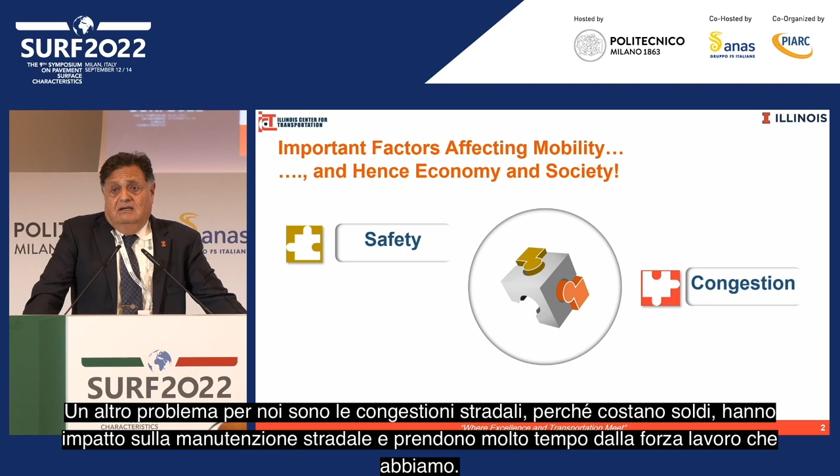In addition, congestion is a big problem for us because it is costing us money. It is also impacting the repair of our roads, and it's taking a lot of time from the workforce that we have. And third is climate change.

Transportation is responsible for 30% of the emissions or greenhouse gases, and now it is the number one sector responsible for the emissions that we have. Most importantly, the emissions coming from transportation are mostly coming from fuel and from oil, and that by itself is a concern.

Now, all this is going to be contributing to the economy and the society. Our role here is to talk about the pavements part and the resilient part of the pavement. So as we are moving forward with this, the three things that I mentioned, I wanted to see how connected and autonomous vehicles will be impacting that.

As we move into connected and autonomous vehicles, the speed of traffic will increase by 8 to 13%, which means we will have a better flow, we will have less use of gas, and this will keep increasing as the penetration of autonomous and connected vehicles increases. Ultimately, we will have an optimized traffic flow and definitely reduce the congestion that we have, because you will have a better connection between the vehicle and the surrounding infrastructure.

As to safety, we will have a much better reliable time as we're moving forward. So as we start applying this technology, the conflicts that we have will be reduced by 47%, whenever 25% of the market is autonomous and connected vehicles. As this penetration increases, the conflicts will be reduced and safety will be advanced even higher and higher.

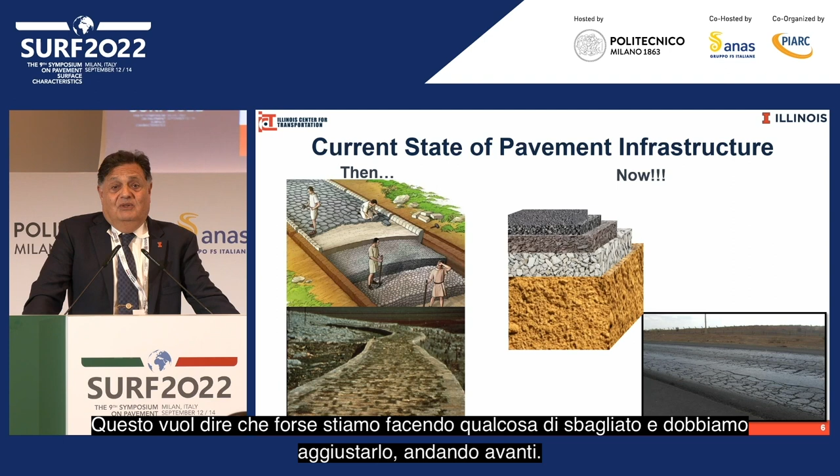Pavements, especially the Romans, they built for more than 2,000 years, and we have some of these pavements still there. Right now we design pavement for 20 to 25 years, and after 10 years it's failing, which means we're doing something maybe not right. We need to fix this as we're moving forward.

I believe the rapidity of technology in transportation—I don't think we've ever seen something like this. It's moving very fast, and this change in mobility is becoming the norm. If we're talking about drones for the first and last miles, electric trucks, or even flying taxis, all this is coming with electrification, connectivity, and autonomy.

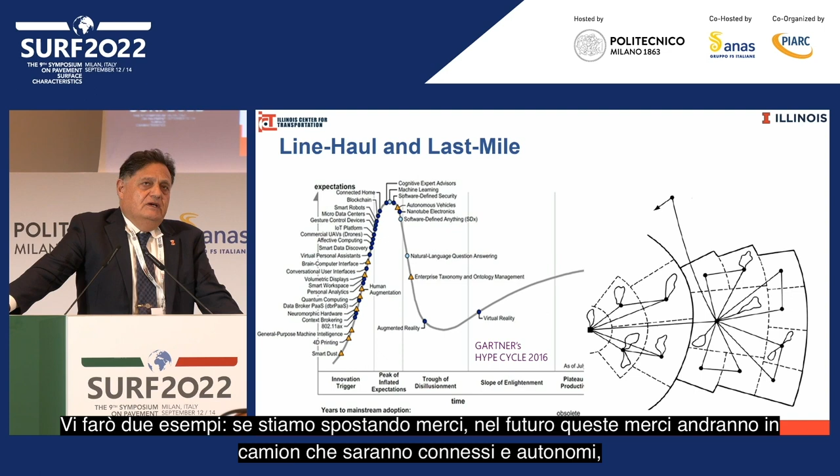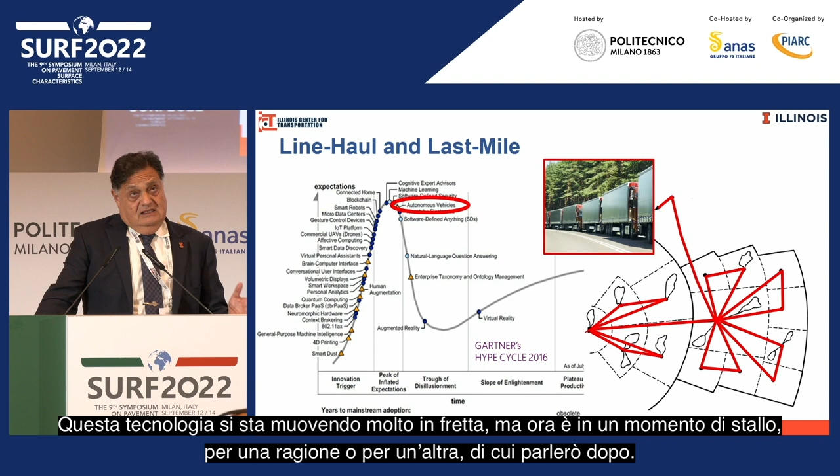I'm going to give two examples here. If we are moving goods in the future, these goods are going to go through trucks—we're going to see autonomous and connected trucks, platoons, using our pavements, and we need to address that. This technology is moving really fast, but now we're having some hold for one reason or another, which I will touch on.

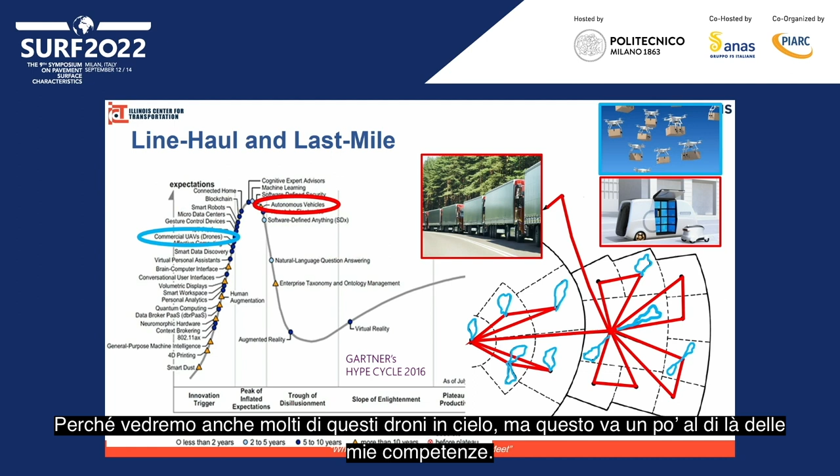As we get goods to specific facilities, that's where we're going to use drones to take these goods to the houses or wherever. Now this will change the mechanism of how these vehicles impact our pavements—they're going to be used more on highways and less within the city. Some of my colleagues are now working on congestion in the sky, because we're going to see a lot of these drones in the sky too, but that's a bit outside my field.

This requires a kind of seamless integration across all these platforms—from the vehicles, autonomy, connectivity, electrification, and most definitely more shared riding. From sensing or health monitoring, we're talking about wireless, self-powered instruments, meaning what we put in will serve for a long time, not like now.

Right now they're like 2-3 years and they're dead. It's got to be network-wide communication, and it's got to be secure. Cybersecurity is a big, big issue as we're moving more into autonomy. Imagine if you're driving an autonomous car and somebody takes over driving your car from you—that's something people are looking at, and it's a serious problem.

From the pavement's point of view, we need to start thinking about what is the true meaning of self-healing, and how we're going to do continuous part sensing, real-time assessment, and energy harvesting too.

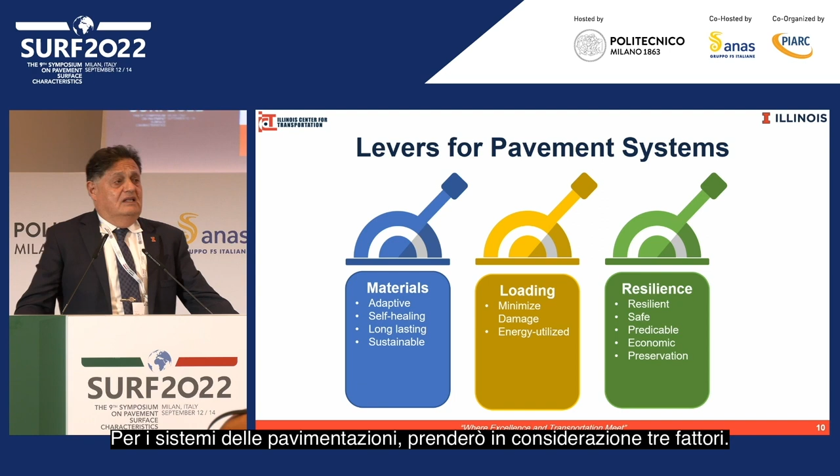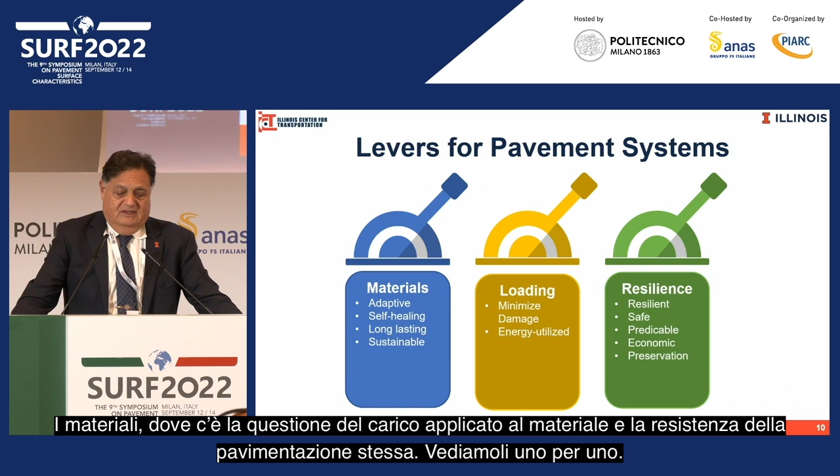So from the pavement systems, I'm going to look into three things today: the materials, the loading that's applied to this material, and the resiliency of the pavement itself. I'll take these one at a time. First, for engineering the pavement materials, we need it to be adaptive, self-healing, long-lasting, and sustainable.

Now, if we look at the quarry, I'm going to be focusing more on the asphalt, because that's my area of expertise, so I apologize for the concrete people. If we look at the quarries, there's a lot of autonomy now happening in the quarry.

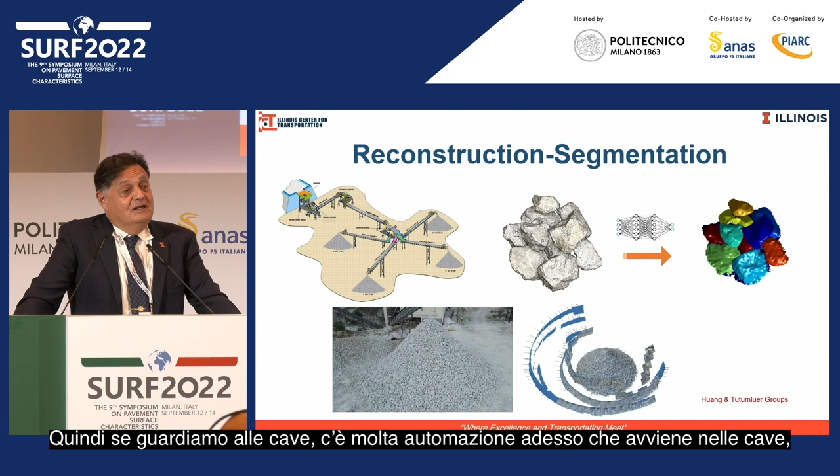Something really important taking place is we can use drones now, and it will go around this pile of aggregate, and it's not just telling you the volume, because knowing the volume is very, very easy. Now we can even get the shape of the aggregate and put these shapes together with a neural network, and we can use this to come up with the volumetric design for the asphalt concrete. This is where we should be going in the future.

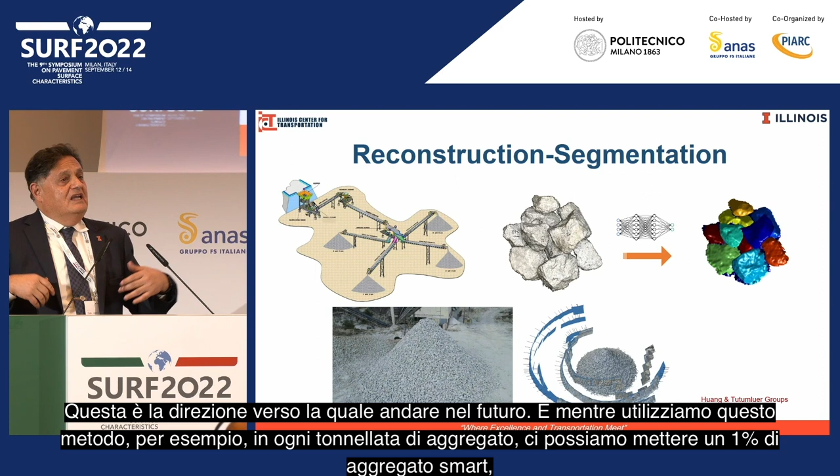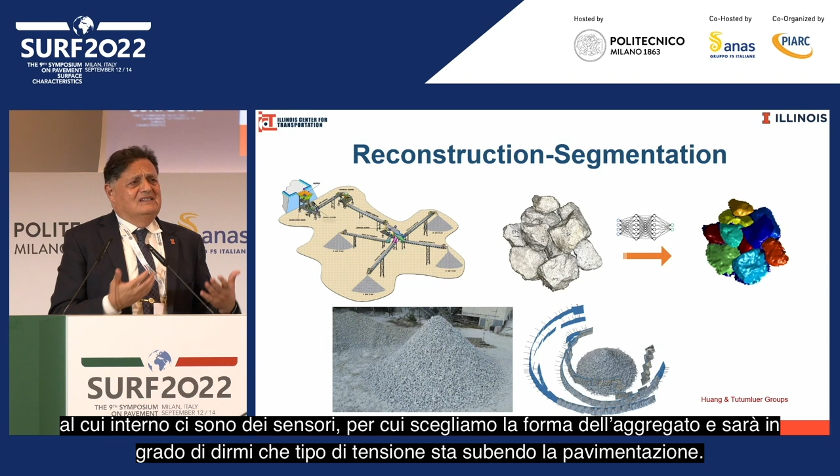As we put this together, for example, in every ton of aggregate, we can put like 1% of smart aggregate, which has sensors in the aggregate that use the shape of the aggregate, and that will tell me what stresses are happening in the pavement itself.

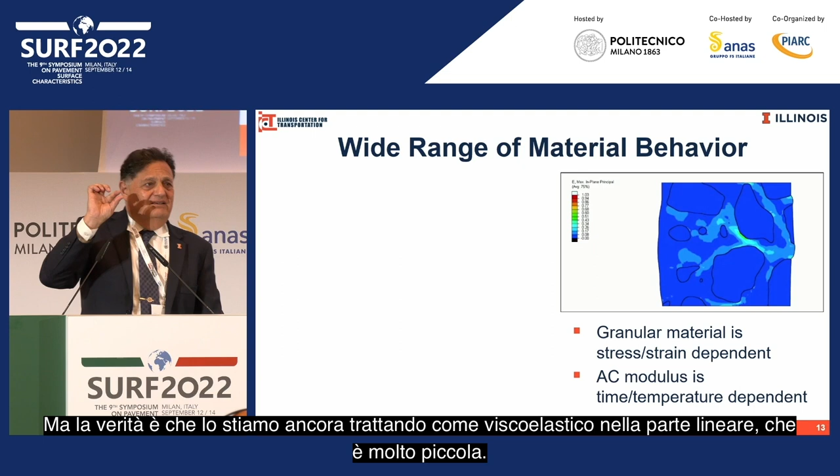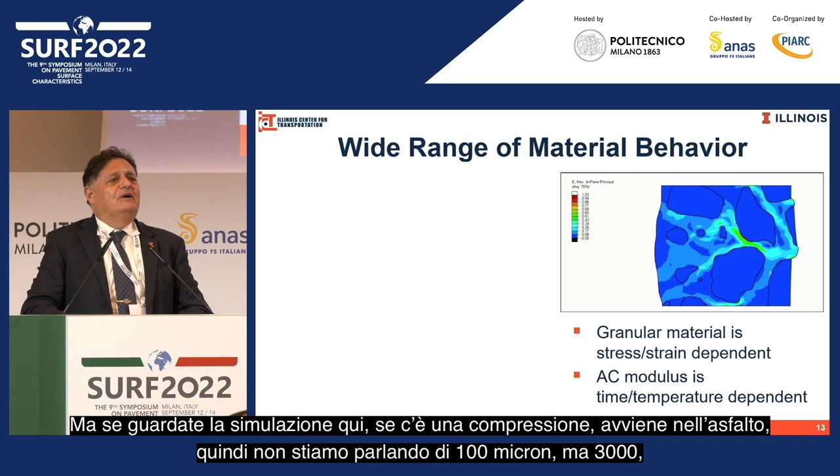As to the asphalt, we have been doing a lot of advancements in the asphalt binder itself, but the truth is we're still looking at this as viscoelastic in the linear area, which is very, very small. But if you look at this simulation, if there is any compression, it's all happening in the asphalt. So we're not talking about 100 microstrain, we're talking about 3,000 microstrain, which means the material is completely nonlinear. The testing we're doing right now needs to expand to nonlinearity if we need to understand what's going on.

And of course, we can at that time apply the principle of temperature and loading for our analysis. For the aggregate, if we're talking about low volume roads, it should be considered stress dependent.

Then we definitely need to think about recycling in everything. We need to make sure of maybe 100% recycling. So we're going to be using some materials like plastics, and I can assure you that more than 80% of plastics are going to the landfills. But at the same time, plastics are many different types. We cannot just keep doing what we used to do before, which is trial and error, taking this plastic and putting it with the asphalt and seeing if it's going to separate or not. This is not the way to do it.

What we need to do now is make sure we look at three things. First, is this going to be reliably applied as a recycled material, and is it going to be really beneficial from the life cycle assessment? That's the first question.

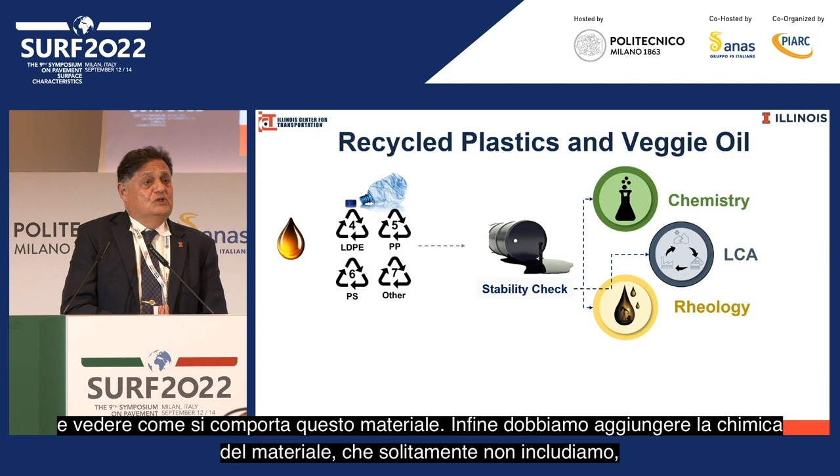Second, I need to be looking into the rheology of this material, but the rheology may be after I extract it, which means I'm first going to mix it, maybe with the aggregate, and then try to see how these materials behave. And then we need to add another thing, which is the chemistry of the material, which we usually don't include. I think this is a very, very important part as we're moving forward.

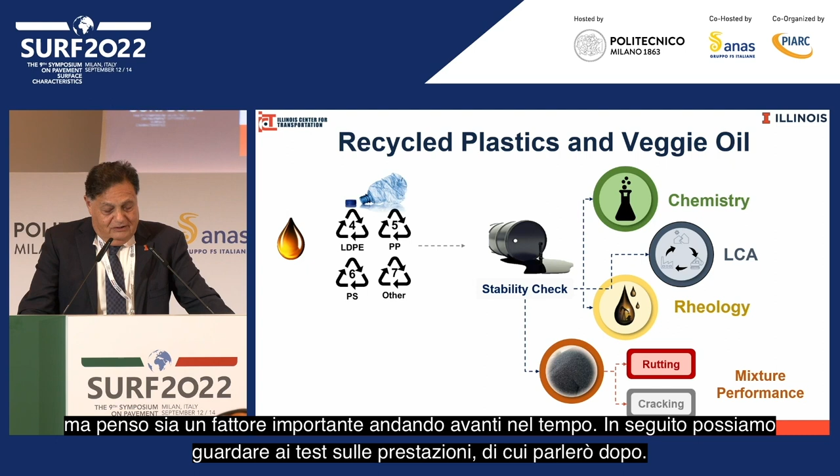And then we can look into the performance testing, which I will also touch on a little bit. If I'm going to consider just two things, cracking in the pavement and rutting in the pavement, I want these materials not to rut and not to crack.

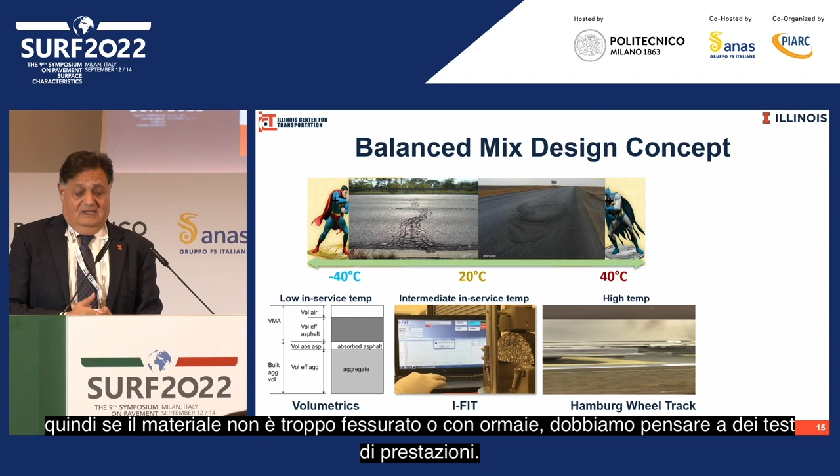We need to come up with some performance testing, and sorry for the second video, it seems that went wide anyway. But this is a Hamburg test. Here's the thing: if I wanted to do a cracking test, I cannot just do, for example, an indirect tensile test and expect to get that cracking.

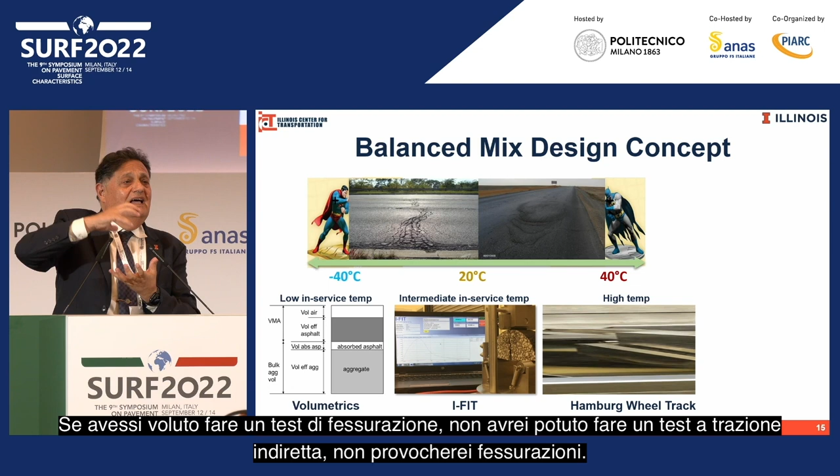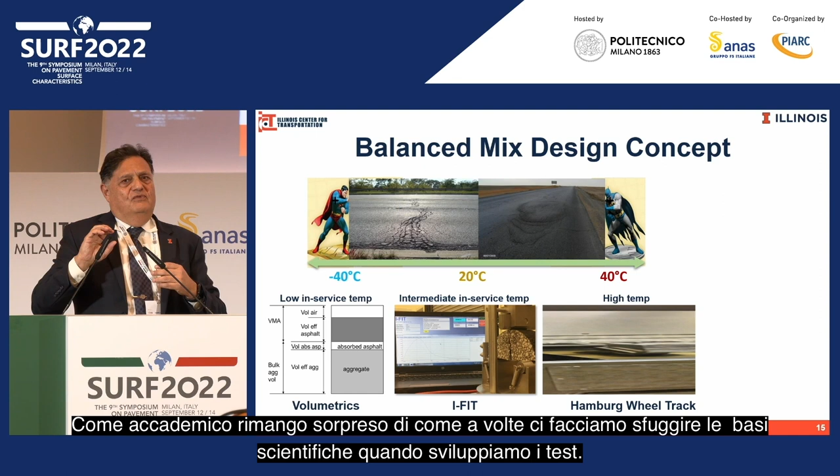Because fundamentally that's wrong. What I need to do is understand the theory and understand the fundamentals. That will work if we're talking just about low temperature, but if we're talking about surface temperature, you must have a crack if you run a test. And I guess as an academic, sometimes I'm surprised how we just overlook some of the basic science or basic knowledge when developing testing.

Running a test, it works as a practical and empirical test. But as we move into the future, we're going to have different materials. We need to make sure we have a test that will be able to predict how the material is going to behave.

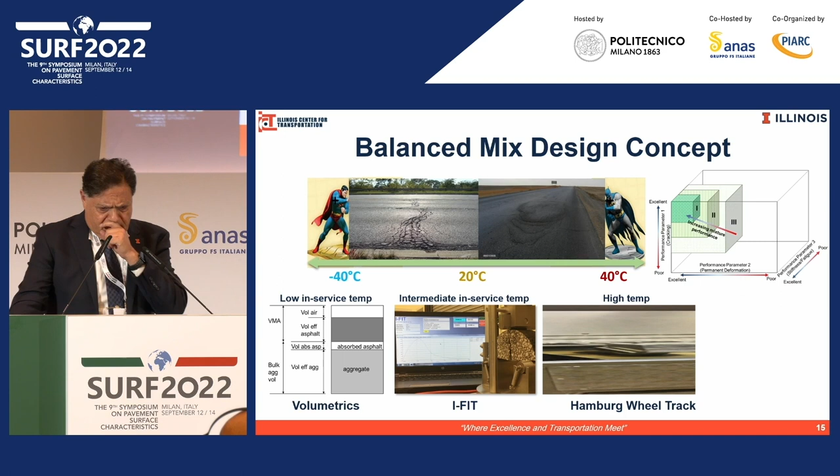Even with the balance, which I'm very, very pleased about, we have a balanced mix design based on cracking and rutting. But there's an important factor missing, which has to do with how stiff the material is. We do have these values that should be added because that's going to dictate if the mix is balanced or not.

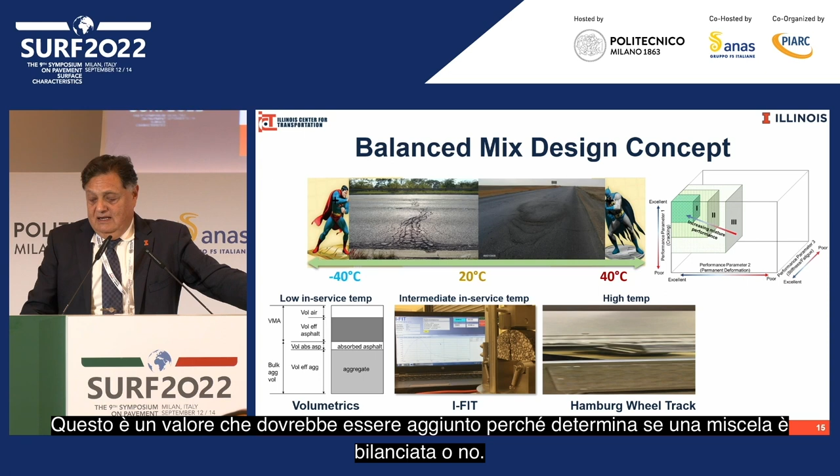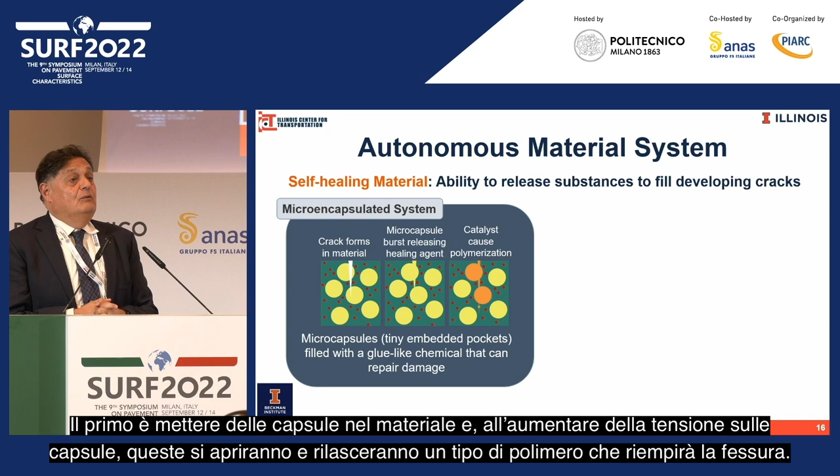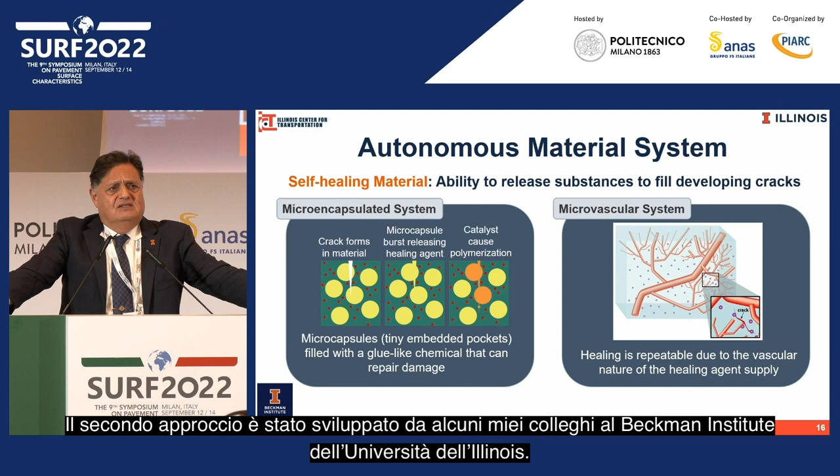As we're moving forward, we need to fix these cracks as they happen. There are two ways to do this. One is maybe you can have capsules in the materials, and as stress increases on these capsules, they will open up and release a polymer that fills the crack. The other approach, developed by some of my colleagues at the Beckman Institute at the University of Illinois, is to look at this like the human body.

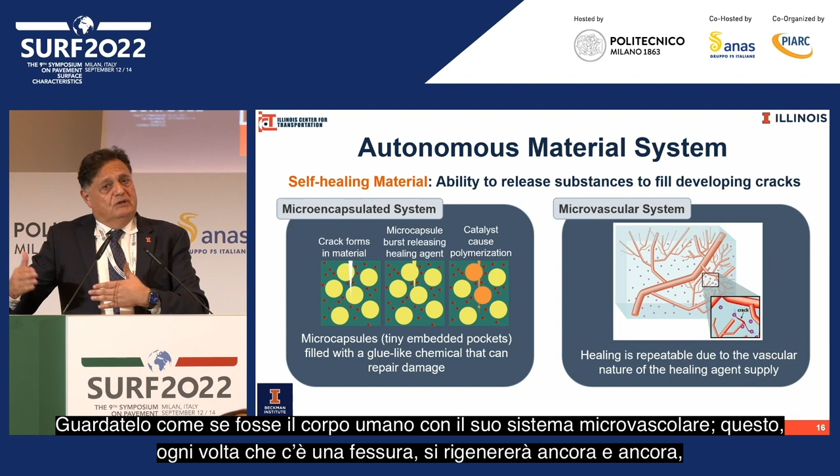It's like the microvascular system. Whenever there is a crack, it will repair it, then repair it again and again. These are the new technologies that we should start applying to our pavements.

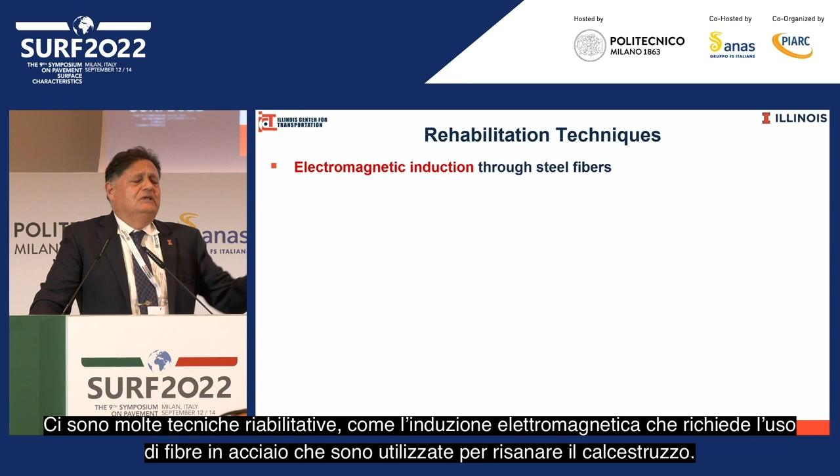There are many rehabilitation techniques, such as electromagnetic induction, which requires putting steel fibers in to help heal the concrete. Here's another thing we're working on with the Army, the Army Corps of Engineers, and Fermilab: looking at the electron beam accelerator.

This came from the fundamental understanding that the aging of asphalt happens just in the upper half centimeters. If we try to repair this upper half centimeter, we can definitely rehabilitate the pavement or give it a very nice surface lift, if I may say.

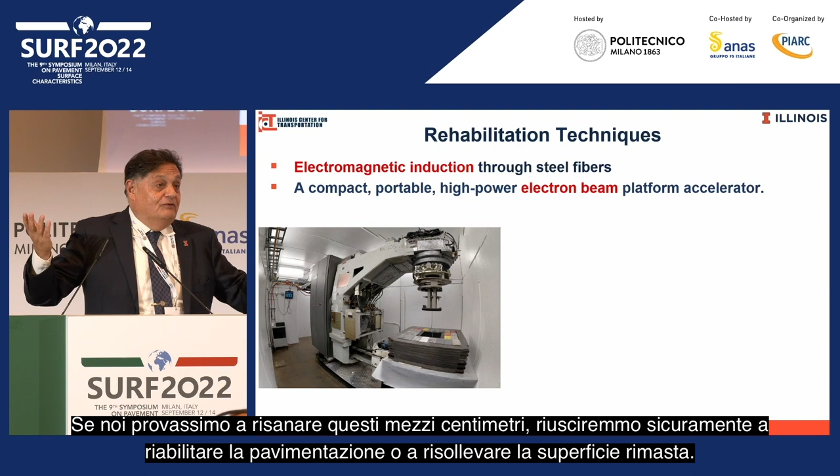So this is ultimately how it's going to look. This is the conceptual plan for the projects we have. And of course, we have cool pavements. There's a lot of work comparing concrete to asphalt, but that's not what we need to do.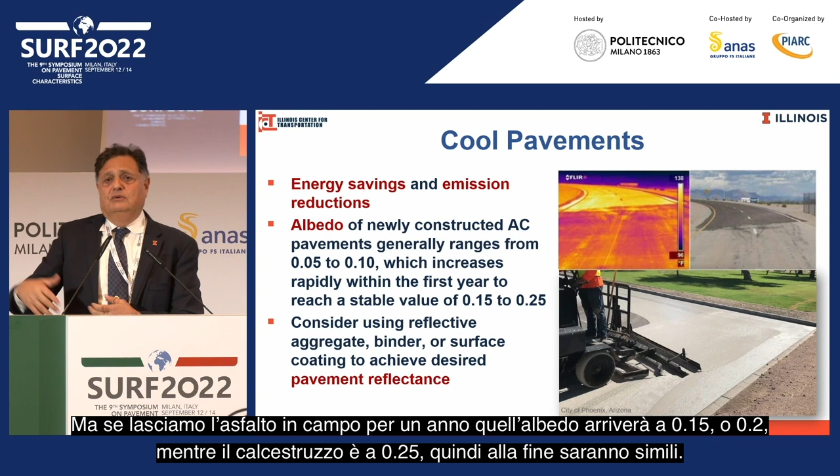What we need to do is try to have a pavement with high reflectivity, like concrete. Asphalt has a much lower albedo than concrete, so concrete is better. But if you leave asphalt in the field for a year, its albedo goes up to maybe 0.15 to 0.2. Concrete is 0.25, so they end up similar. Think about it that way.

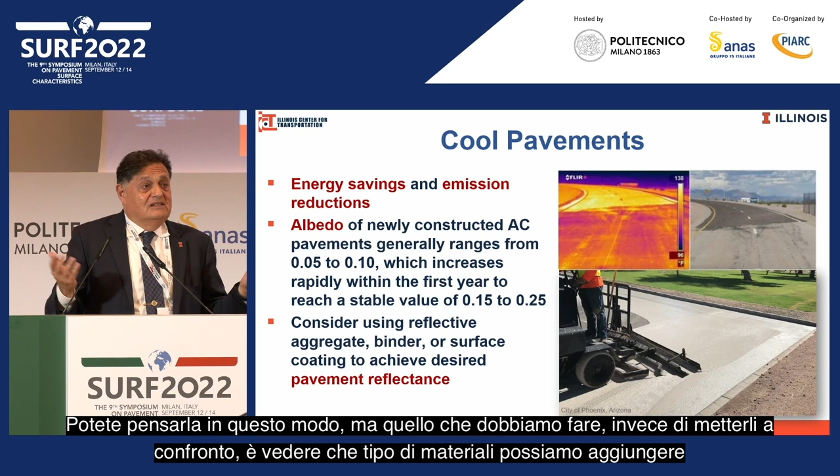But instead of comparing the two, what we need to do is see what materials we can add to increase this kind of reflectivity and increase the albedo.

Moving into pavement loading, and I want you to keep me on time. So we need to minimize the damage and use energy harvesting or utilization. Let me start by saying the load we apply to pavement comes from different tires. It could be wide, it could be two. For roads, that's maybe simple.

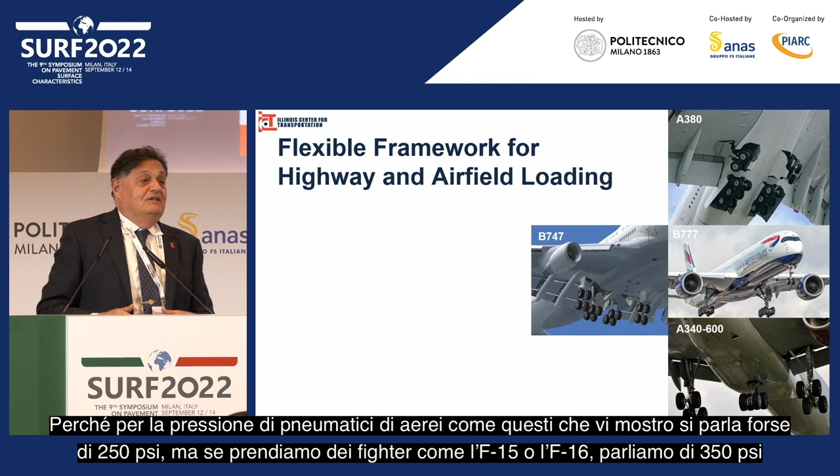If we get into airplanes, it becomes very, very complex. I remember being in Milan maybe 8 years ago when the Air Force was trying to think about getting the F-35. The main concern actually isn't the load coming from an airplane like this, it's more coming from the tire pressure. For an airplane like the one I'm showing, tire pressure might be 250 PSI, but if you go to a fighter like the F-15 or F-16, that's 350 PSI.

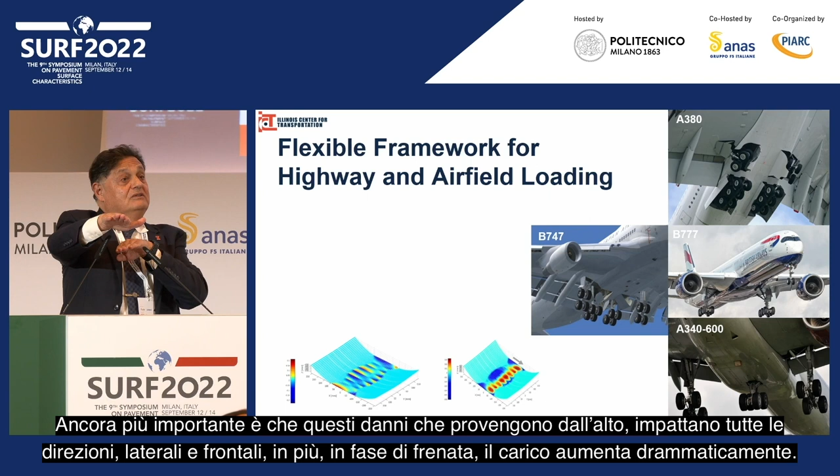That's going to do a lot of damage to the surface of the pavement. But most importantly, this damage doesn't come just from a load going in one direction. It goes in this direction, this direction, this direction. And when they brake, that load increases dramatically. So anytime we try to model the load, it has to be in 3 dimensions.

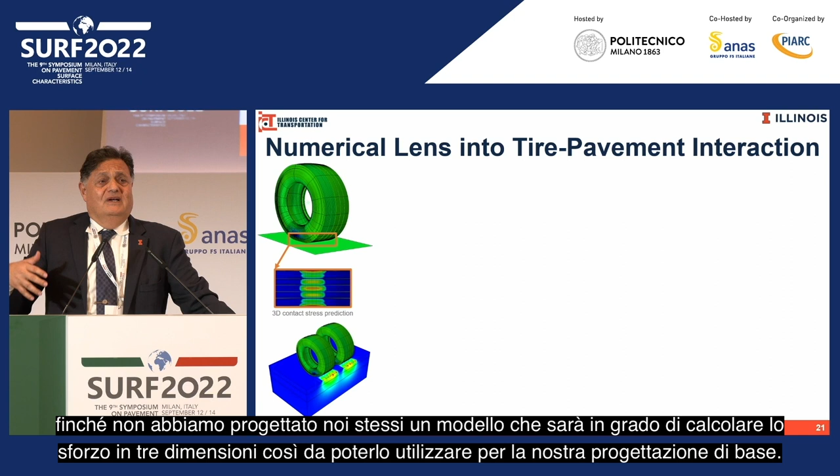We used to send this to South Africa to measure the stresses in 3 dimensions by applying different loads and different tire pressures, until we came up with developing a model ourselves that would be able to get the stresses in 3 dimensions so we can use it in our finite element modeling.

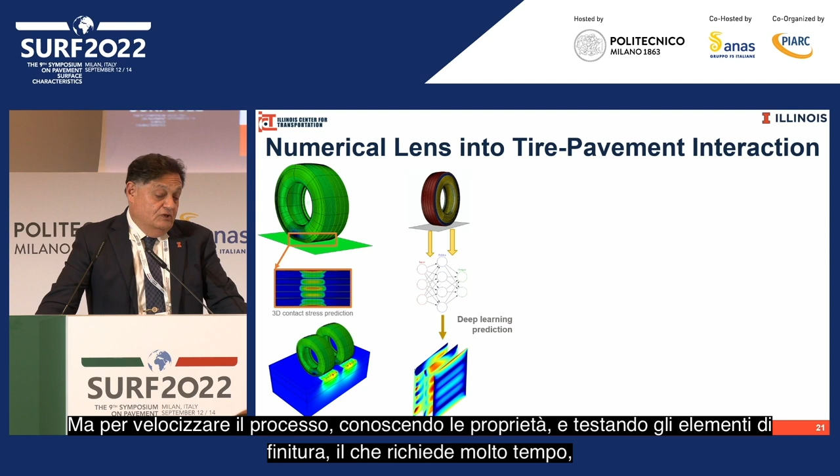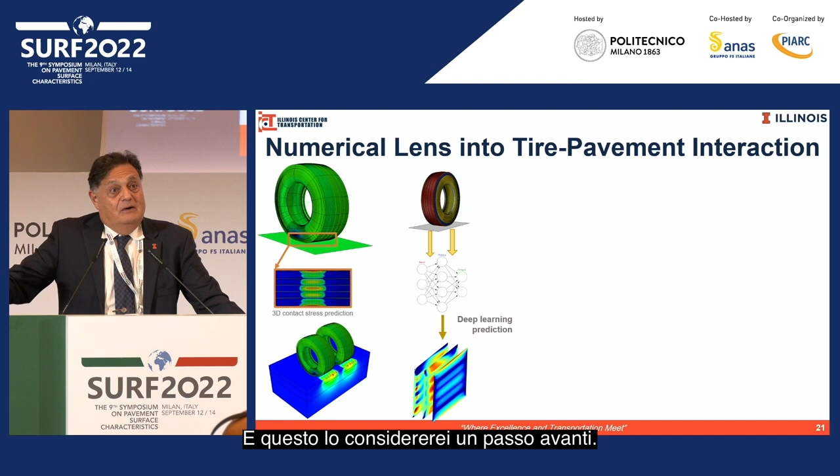But to make this faster, instead of knowing the properties and running so many finite elements, which takes time, using data sciences and deep learning, we will be able to predict the contact stresses in 3 dimensions for any tire. And that's what I would consider a step forward.

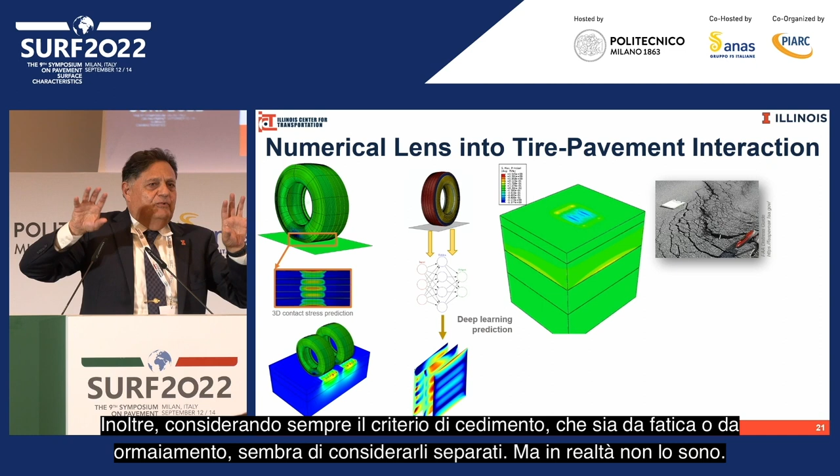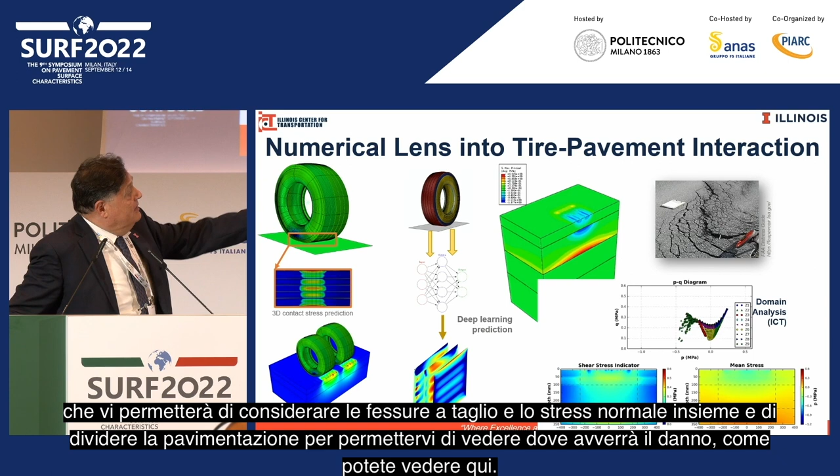Now, we always consider different kinds of failure criteria, like fatigue or rutting, as if they are separate. Actually, in real life, they are not separate. You have fatigue and rutting happening together, and that's where we have a new model we call the domain analysis, that will allow you to consider the shear and normal stresses all together and divide the pavement in order to see where the damage is going to be. As you can see in this picture, I can tell where the maximum stresses are, and you can see it's almost 2 inches below the surface.

This is my favorite slide, by the way, because this is a new thing we're looking at, and it's going to save us a lot of computational time and money. This is using the graph neural network, borrowed from people who were doing fluid mechanics—I'm going to look at the department head who's working on fluid mechanics. This is something that's really neat.

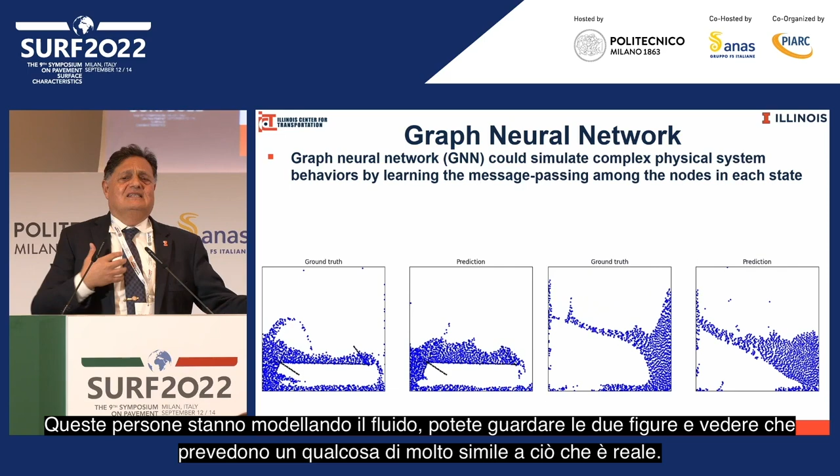These people are modeling the fluid, and if you look at the two pictures, what they are predicting is similar to what the ground truth is. What we are doing right now, instead of 3 days to run a complex finite element model—and by the way, University of Illinois has the fastest computer in the world, supposedly, and it still takes a long time to do it.

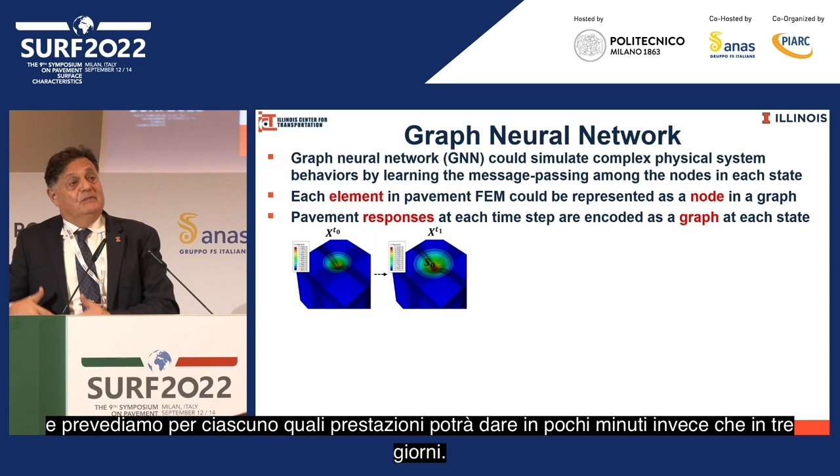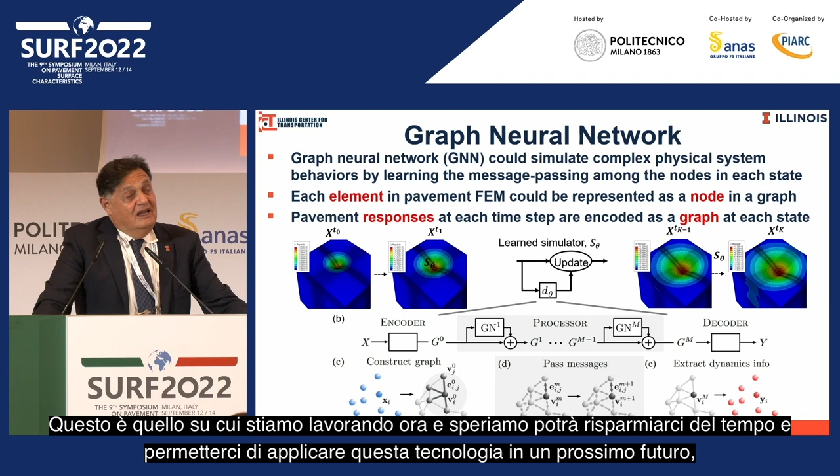What we are doing now is we look at each element, and there are sometimes hundreds of thousands in the model, and we predict each one of them. So we will be able to predict what the finite element could have given us in a few minutes rather than spending 3 days. This is something we're working on right now, and hopefully it will save us a lot of time and allow us to apply these technologies in the future to have a better prediction of pavement performance.

A lot of people talk about platoons. If we look at platoons, this is having trucks driving behind each other with a specific distance. In the United States, depending on the state, usually we have between 200 feet to 250 feet between the trucks. Now people are saying they're going to have 10 feet between them—I don't think I will ever see this in my life, but I think we will see 50, 60 feet between them.

Now, as these trucks are moving like this, they could be as low as 2 and as high as 10 trucks in a platoon. Right now the experimental work is with 1 to 2. You're going to see more damage happen in the pavement.

I'll give an example. Where I live in the state of Illinois, we found that in the interstate system, 87% of the roads are platoonable, meaning they can platoon, during the peak hour. If it's off-peak hour, it's 93% of the network that's platoonable, which means whether we like it or not, they're going to platoon. Actually, when you're driving, sometimes you see truckers drive behind each other because that can save up to 15% in fuel. So this is really important.

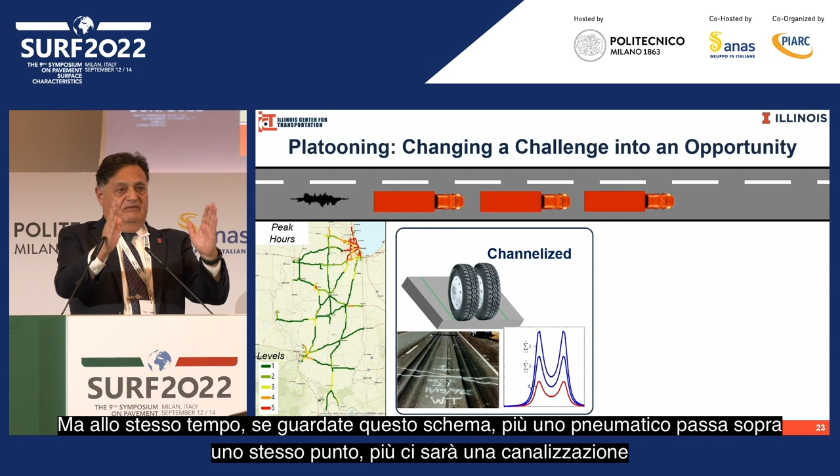But at the same time, as you look at this schematic, as the vehicles keep adding in the same spot, you're going to be having channelized loading. This is going to do a lot of damage to the pavement.

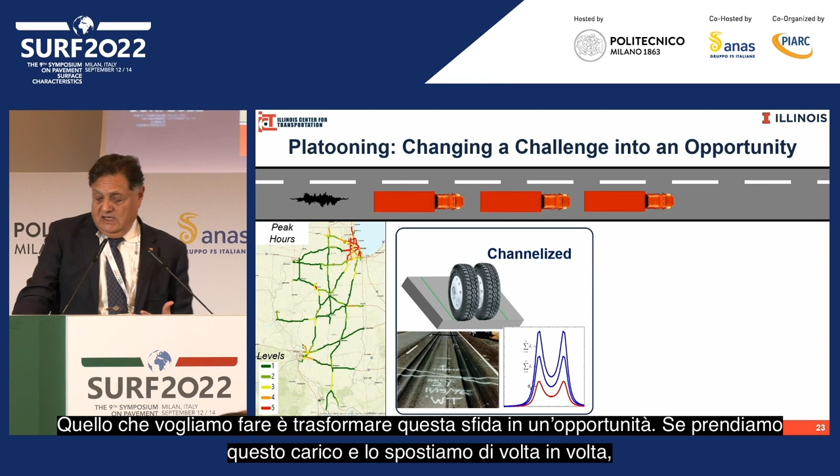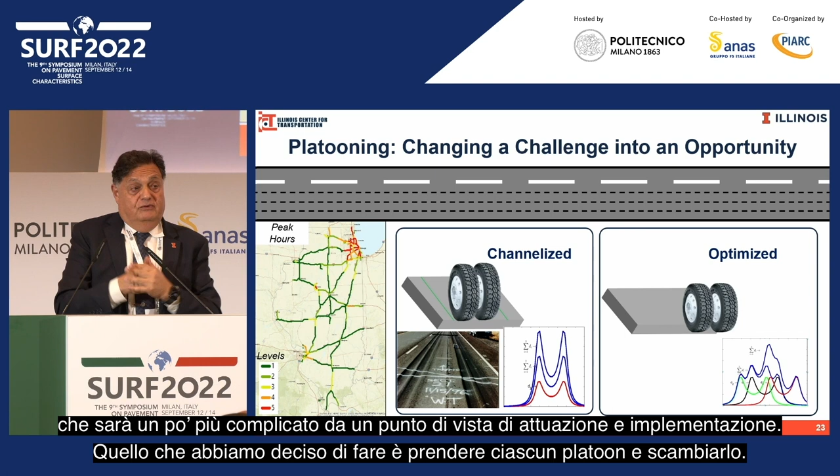What we wanted to do is change this challenge into an opportunity. Simply, if we take this load and keep shifting it, we're distributing the load over a bigger area. At the beginning, we thought we were going to be shifting each truck individually, which would be a little tougher from an application or implementation point of view. What we decided to do instead is get each platoon and shift the whole platoon.

So if I look at this here, there are three things that are important. First is the rest period, which is how far I want these platoons from each other, how much I need laterally to be able to have them from each other, and what is the number of trucks in the platoons.

I can tell you, in a study we published recently, we found that with platoons, if we design it well, we can increase the service life of the pavement, and it's going to be much, much better than what you have from human-driven trucks. This has been published recently.

This problem is that I need a 30 to 90 minute charge to reach 80%. Usually you have a trucker drive maybe 600 miles, and you don't want to stop for an hour and a half in order to charge. That's called inconvenient. So this is one of the problems here - the charging.

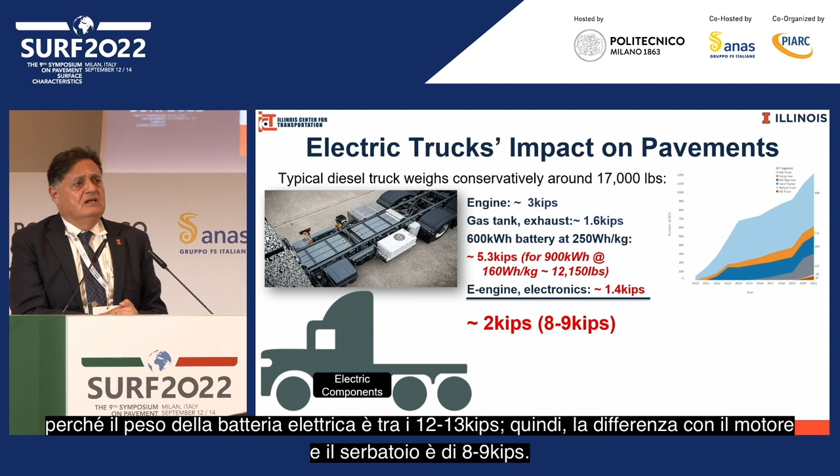So frankly, as reported, it's 2 kips, and in the United States now we do allow an increase for trucks which use renewable energy, including electricity, to go up by 2 kips. But the truth is, talking to many people in the trucking industry, that's going to be an increase of 8 to 9 kips, because you have like 12 to 13 kip weight from the electrical batteries and so on. If you take the gas and engine, the difference is around 8 to 9. So that's going to be very significant, unless some advancements happen, and that's going to be like 4 to 5 years from now.

So what we need to look at is that there's going to be an increase in weight. What is the penetration going to be of these electric trucks in the field? What is the charging interval, how often, and where are these stations? That's also going to play a role. And most importantly for pavement people is how much this increase in axle weight is going to be impacting the pavement.

And the final topic is looking into pavement resiliency, which is talking about the safety and how to predict the pavement performance and the economics of it, as well as the preservation.

When we build the pavement, one of the most important things we look at, when we pay the contractor or try to predict the performance, is the density of the pavement. We all use nuclear gauge, and I think I can say that safely. We all know it's not very accurate, and it's just based on how we calibrate it, but we go with it.

One way to do this is to use ground penetrating radar, and I'm going to emphasize here, in the right way, based on the fundamentals and the theory, and not based on regression. Because regression means you want to calibrate it all the time, and that depends on the project you have, which might not give you good results.

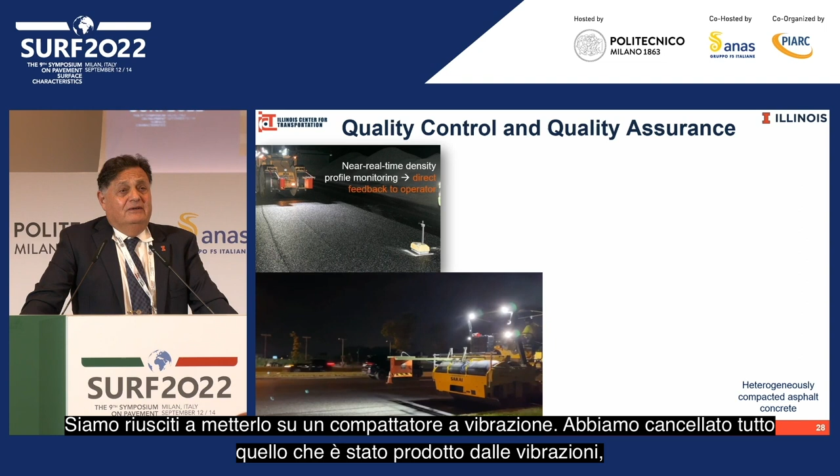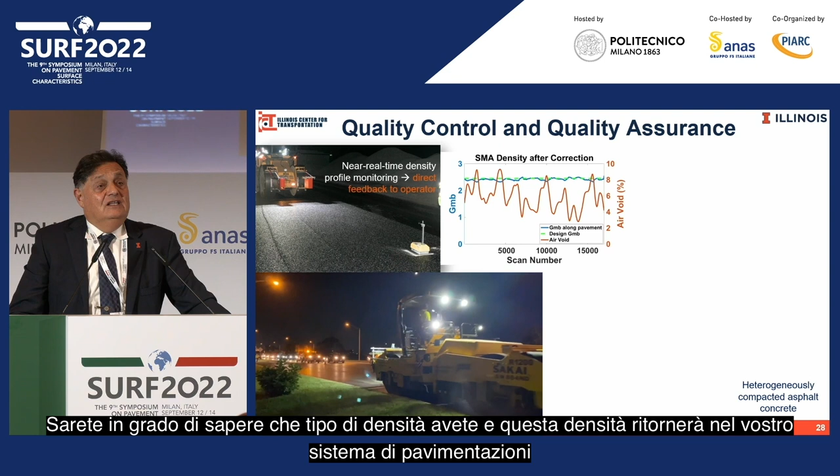This is now part of a project sponsored by the Federal Highway Administration. We were able to put this on a vibrating compactor, and we canceled everything from the vibration and the noises, so the electromagnetic waves you receive are completely clean and clear. You'll be able to know what kind of density you have, and this density will go back into your pavement system so you can evaluate your pavement system in a very appropriate way.

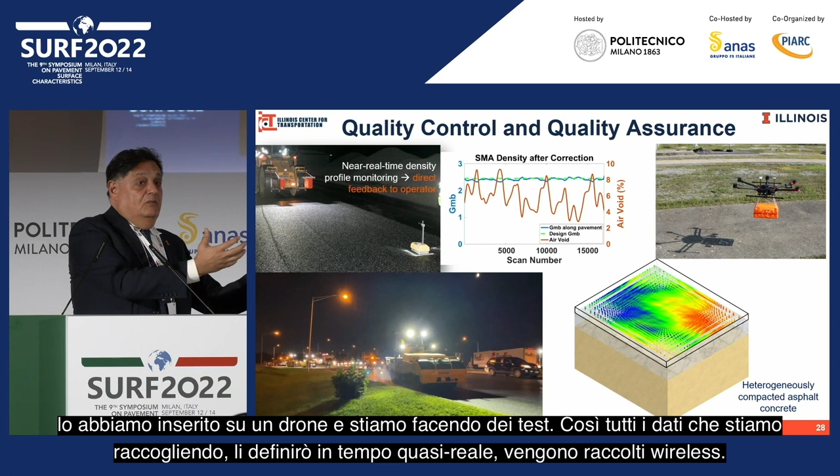Recently, we've been playing with this. Instead of putting the radar on the compactor, we now have it on a drone, and we're doing some testing on this. All the data we're getting is in near real time, collected in a wireless way.

Yesterday we heard Richard and Gerardo talk about safety, most importantly coming from the driver-vehicle-environment perspective. We can be in control of the pavement part, or the friction that is impacted by the vehicle and the environment, and we mainly used the locked wheel skid trailer.

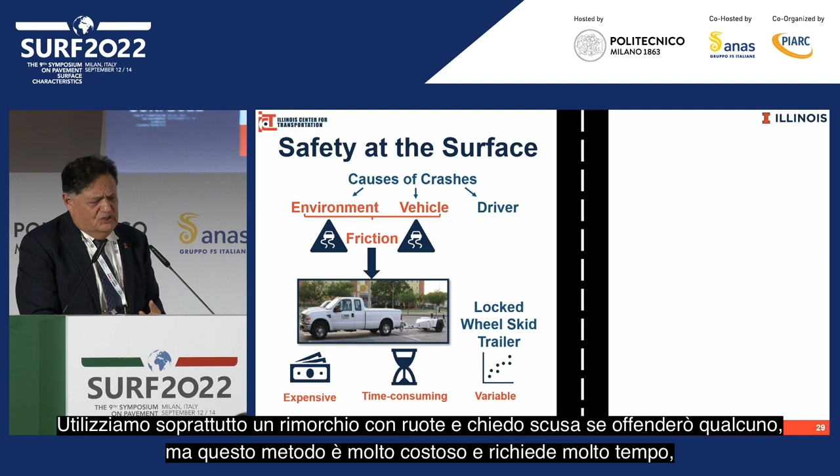I apologize if I offend anyone, but this is very expensive, time consuming, and the results are variable, since we're taking measurements every X number of feet. So frankly, we don't have really good data with this approach. We need to do something a little different.

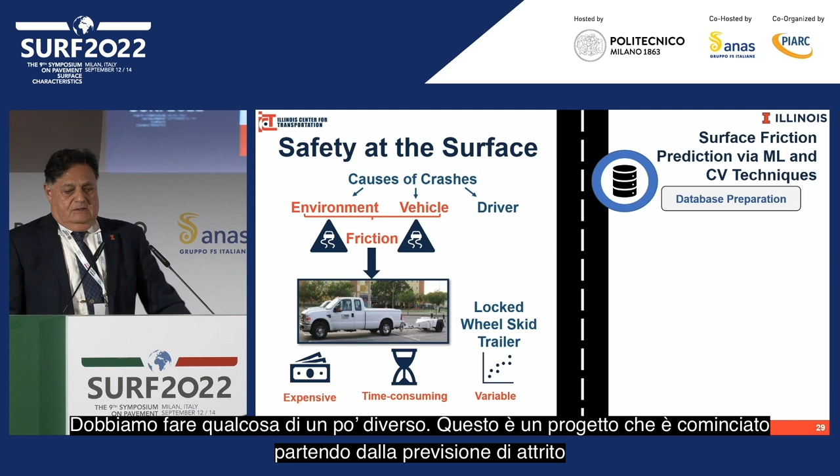This is a project that started looking at friction prediction via machine learning, and also looking at this from computer vision techniques. The way this will work, I'll show in the next slide.

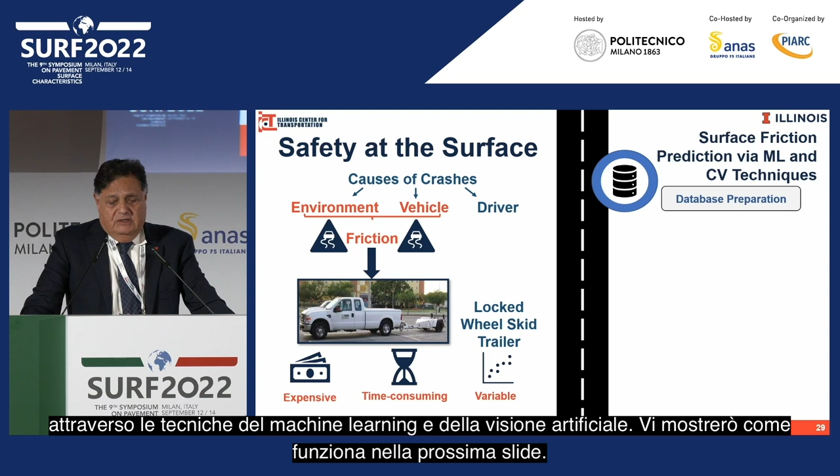We're going to need a lot of database preparation. We need to look into the computer vision algorithm, and this involves very complex equations that we started on. Then we use machine learning model development based on the results, and then we have an automated system. So if I'm going to put this here, it's like this.

You're going to be collecting data, and now we're looking at data collected in 360 degrees. This data will be reconstructed to recreate the surface at a very, very small level. Then after that, we'll try to predict the surface friction from the texture. Actually, the friction comes from the texture.

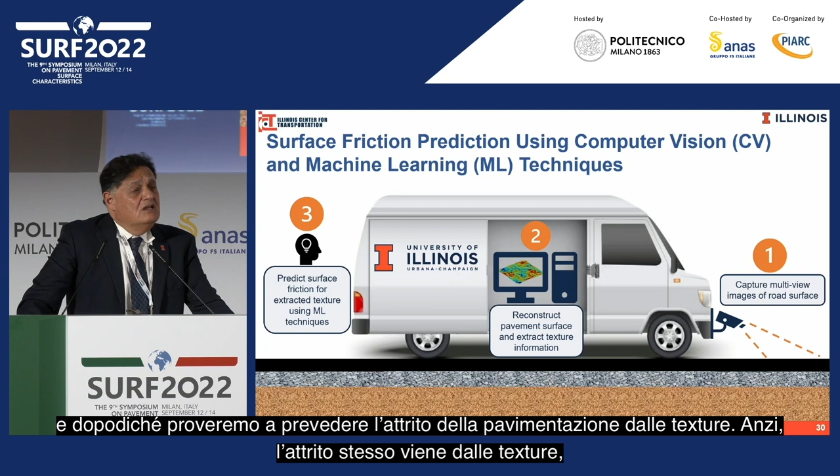So what we're trying to do now is collect as much data as we can and do the analysis, and that's where we'll be able to get the friction without using the lock wheel.

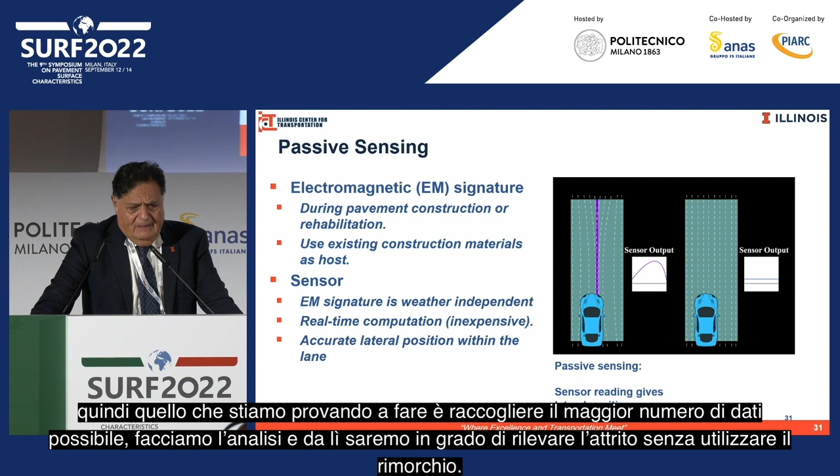Then we have two ways to control the vehicles, the autonomous and connected vehicles, when they are driving. One way, for those of you who have an autonomous and connected vehicle, is that the vehicle looks at the paint on both sides of the pavement, and that's what controls the vehicle direction.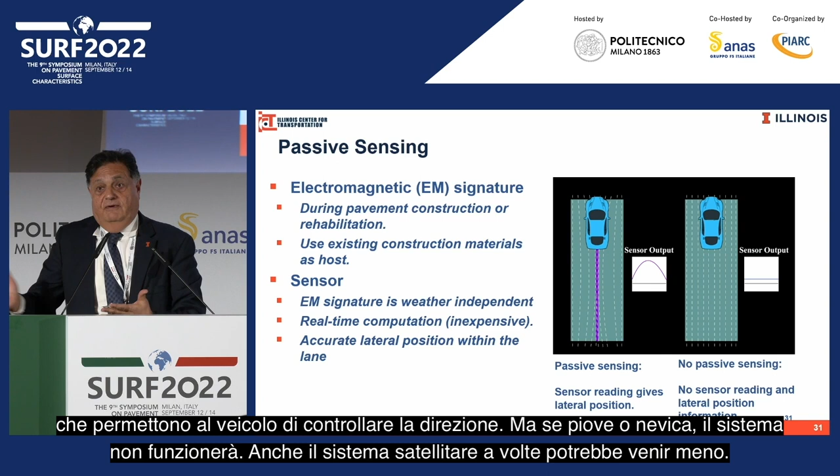Now, if it's rainy or snowy, this system will fail. Even sometimes the satellite system will fail. So we need something that is completely reliable at any time, and that's where pavement people can help.

One of my colleagues is working on a system that uses electromagnetic signature. This is completely independent of the weather and will be able to direct the traffic. We did the experimental work successfully on this, and it's really going to help.

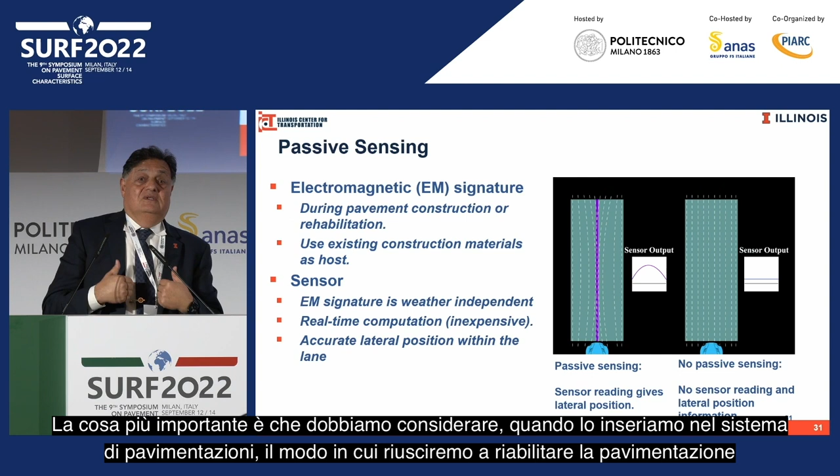Most importantly, we need to consider how, when we put this in the pavement system, we're going to rehabilitate the pavement, how this is going to impact it, and how deep we need to go. So this is part of the development of this technique.

Of course, we cannot talk about pavement without talking about sustainability. I mentioned that earlier, but also we're always talking about environment, economy, and social aspects. There are three stages: material acquisition and construction, maintenance, and use and end of life. Of course, the use stage is the most complex, but also the most important one.

This stage is responsible for maybe as low as 45 or 50 percent to as high as 85 percent. And usually we're looking into three things coming from the pavement, other than the albedo and so on that I mentioned earlier.

The rolling resistance is coming from the structure, the pavement-tire interaction is coming from the texture and the deformation. We spend a lot of time on things that maybe don't make sense, like, for example, is concrete better than asphalt when it comes to rolling resistance? My answer is simply no, because most of the deflection is happening in the tire—90% of the deflection is happening in the tire. There's much less deflection to worry about in the pavement material. It's a little different, but it's not something to worry about.

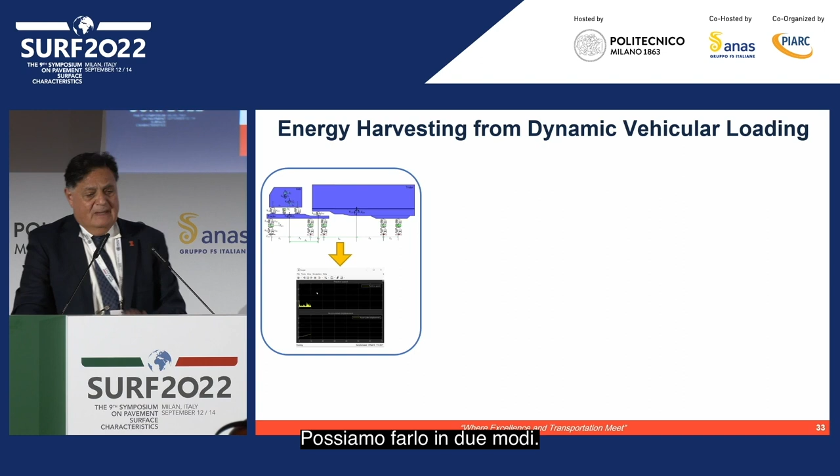First, yesterday we heard about using the International Roughness Index with the golden car, or the quarter car. Actually, we need to think, is this the right way to do it? So we need to go step by step—we went to half a car, then we went to a full car.

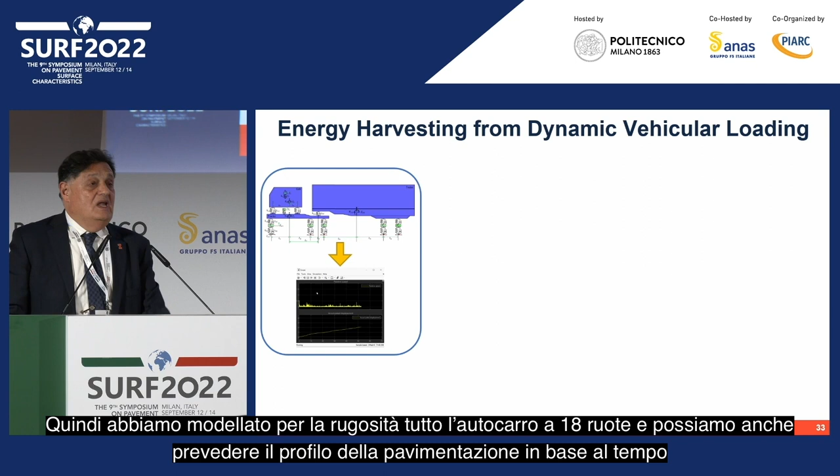But I'm more concerned about the damage to the pavement. The damage to the pavement is coming from the trucks, not from the cars. So if I'm going to be concerned about the trucks, I need to model the 18-wheeler, the big truck. And that's what we did—so now we model the whole 18-wheeler for the roughness.

We can also predict the profile of the pavement over time, which will impact the dynamic loading on the pavement and allow us to predict the damage. Please notice here that the roughness of the steering axle is different than the tandem, and different from the rear one—something we don't even consider when doing the golden car model.

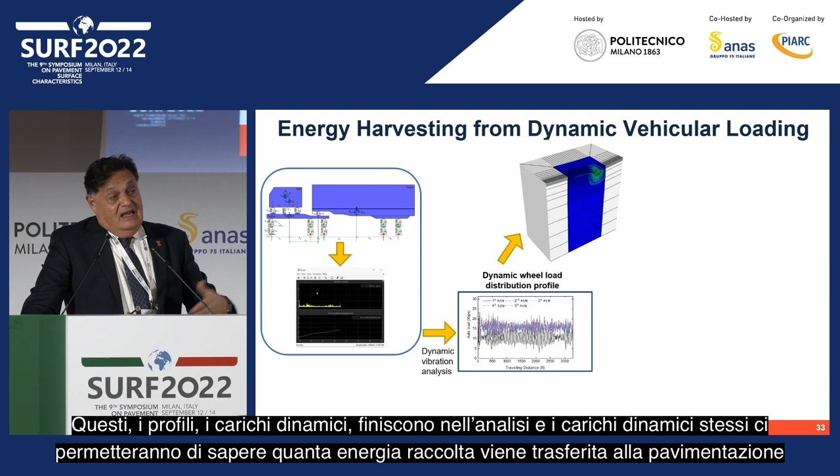These profiles and the dynamic loading can go into the analysis, and the dynamic loading itself will allow us to know how much energy harvesting we can get from the pavements so we can give it back.

Of course, I will not spend time here—I think I should mention the solar, thermal, hybrid systems. These are all systems that will also improve our pavement.

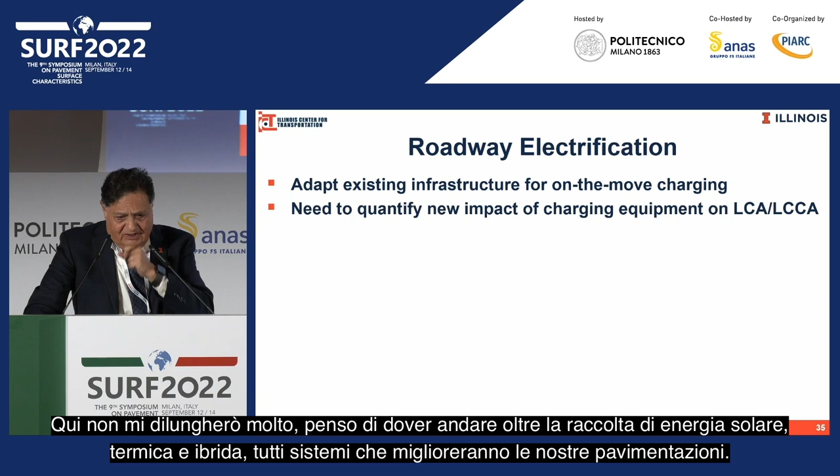Okay, this is a video—please don't turn on the music. Okay, let's see if you can get it. We don't need... let's try... okay, you need to push again. Let's see, here we go.

This is a 2.9 mile site, going to be over 1,000 acres, for which we've already finished the conceptual design in Illinois. This is supposed to be a net zero emission facility, focused on testing freight.

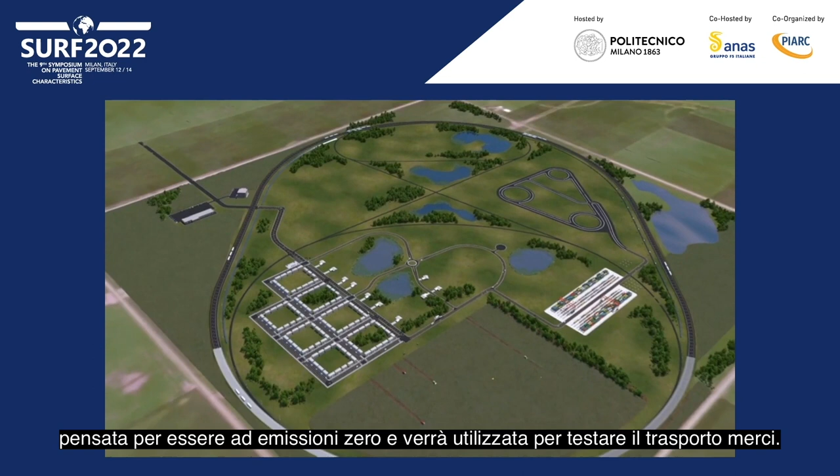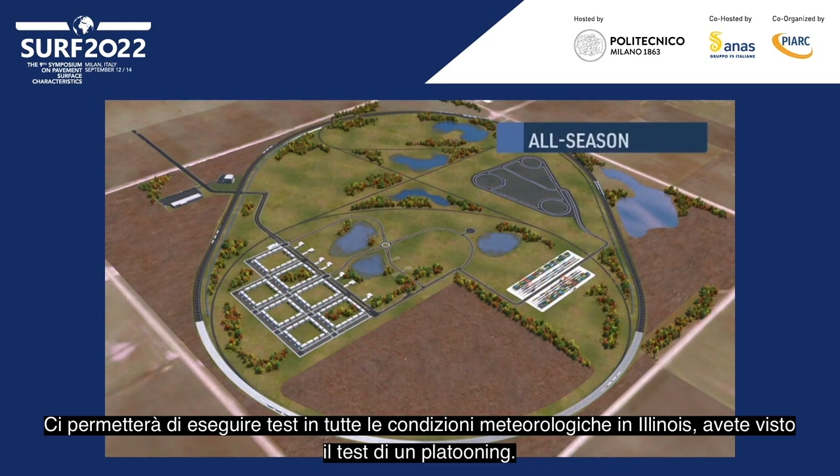You can see here we're doing everything from dynamic test pads to multi-modal areas, suburban areas, agriculture, and energy harvesting. This will allow us in Illinois to test all weather conditions. You can see testing of platooning. This is the urban area where we have the smart intersection—these vehicles are going to be negotiating who goes first as they move. Agriculture automation is a big thing.

The same goes for transit testing. Of course, we don't want to ignore the wetland. And you can see here the roundabout—they all negotiate without signaling or stopping beforehand.

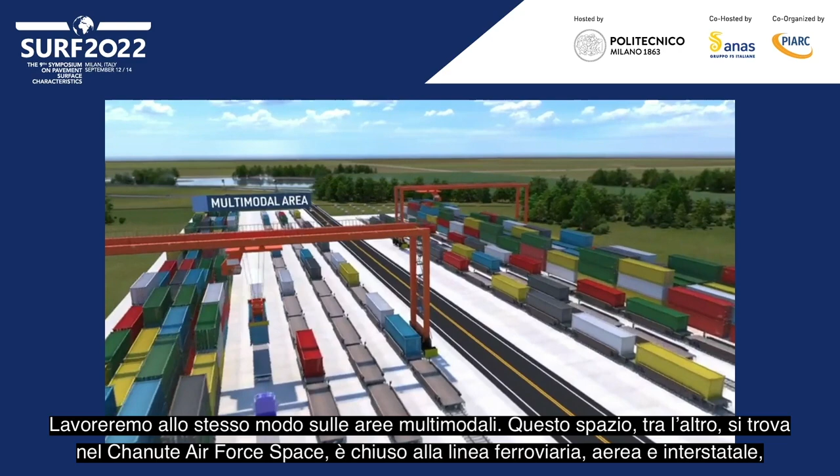The same way we're going to be working on the multimodal area. This place, by the way, is at Chanute Air Force Base, and it's close to rail, airport, and interstate, all within 1 mile. It's going to be used for all-weather testing, from snow to rain to fog.

And we will be having, as I said, energy harvesting, as well as instruments to measure the pavement. This is something that will be coming soon. This is an interesting project we're working on.

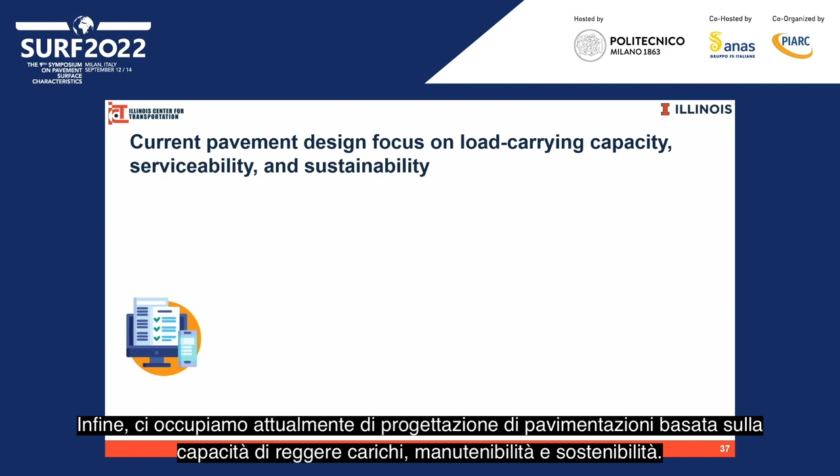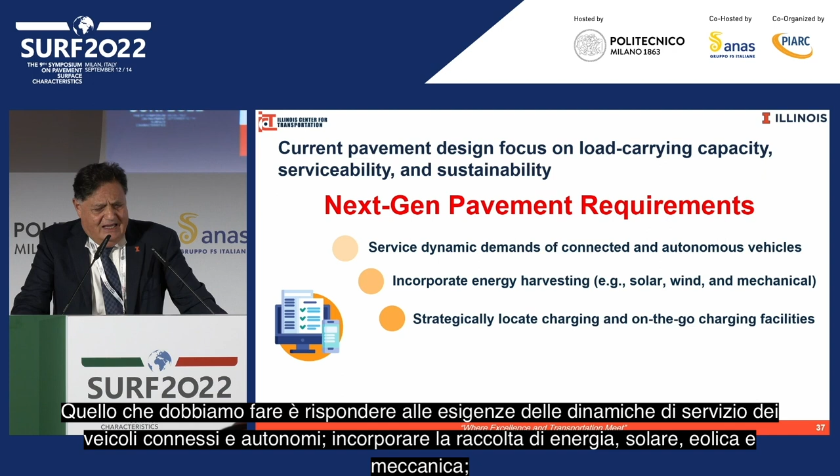Finally, currently we do pavement design based on load carrying capacity, serviceability, and sustainability. What we need to do is serve the dynamic demands of connected and autonomous vehicles, incorporate energy harvesting from solar to wind to mechanical, strategically locate charging and on-the-go charging facilities for the pavement, design with self-healing materials and self-powered sensing, and of course account for active lighting and vehicle-to-everything communication nodes.

One last thing I wanted to tell you: we are working right now on how we're going to use quantum computing for computation as well as for communication, because it is definitely much safer when it comes to cybersecurity, and much faster. So we've already started working on using quantum for this.